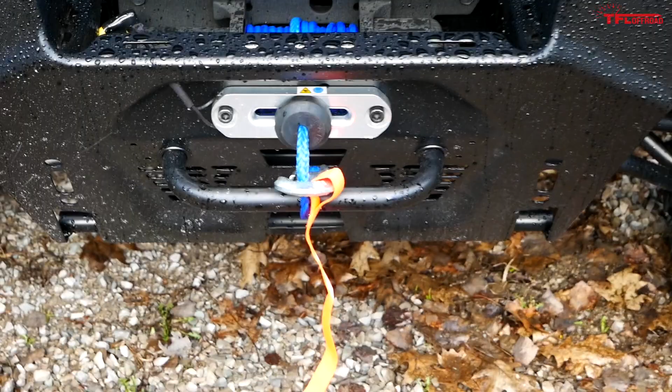Here's another one of the upgrades. That is a winch right from the factory, 4,500 pounds, and it uses Polaris's new synthetic rope, so there's no more steel cable. Oh, and while we're talking about the winch, I should mention the winch came with this, a wireless controller, which is just brilliant. It really makes a lot of sense so that you don't have to crawl through the mud, hook up a controller, and then winch out of there. This thing, you keep it in your pocket, and then anytime you need to use that winch, you're ready to go wirelessly. I cannot wait to put that winch to use.

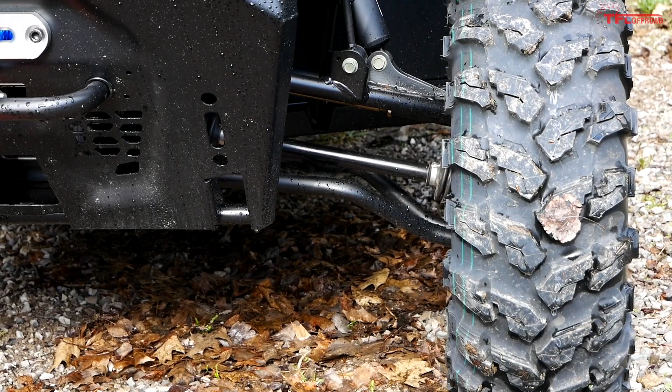And then another one of the big upgrades you can see right here in the front, arched A-arms. Those arched A-arms just help to get everything up out of the mud, and the less stuff you're dragging in the mud, the better. Now Polaris lists the ground clearance here on the Backcountry Edition at a full 13 inches.

So those are some of the changes, but when we're talking about the powertrain here, it stays exactly the same. So the engine is still a 999cc 4-stroke dual overhead cam twin cylinder making 82 horsepower, and you can see the engine right back here.

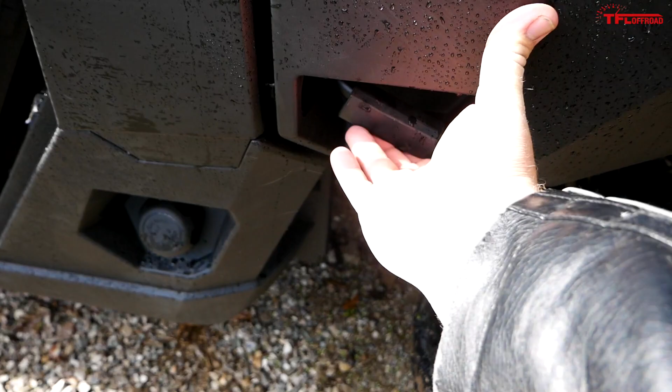Now having those snorkels does not affect the dump box, so you still grab your handle down here and the bed will dump for you and also give you access to the engine.

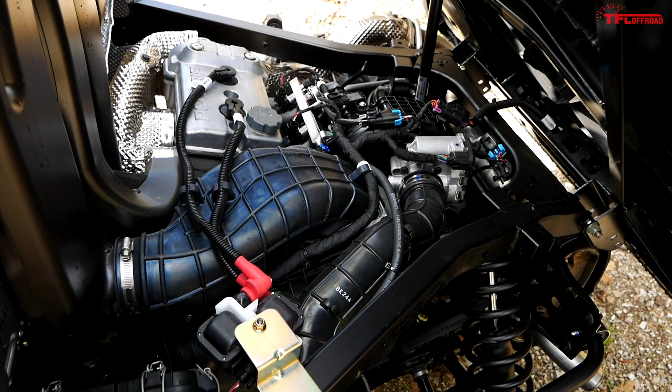So like I said, this is the same engine in the regular XP1000, offering 82 horsepower, but here in the Backcountry Edition we also get lower gearing, so this engine should feel a little bit beefier low down than the standard XP1000 does, and it should also have just a slightly lower top speed because the gearing is a little bit lower.

Now let me riddle off a couple more numbers for you guys. So the estimated dry weight of this machine is 1,597 pounds. The box back here is rated to handle 1,000 pounds of payload, and I definitely want to put that to the test. The fuel tank on this Ranger equals a total of 11.5 gallons or 43.5 liters.

Ground clearance, as I mentioned, is 13 inches. Now overall vehicle size, the length here we're talking 120 inches, the width we're at 62.5 inches, and then the height you're at 77 inches.

If you're talking about overall payload capacity, Polaris puts it at 1,500 pounds. So basically if you get 1,000 in the bed, you can still put 500 pounds of people up here in the cab. The wheelbase here, we have a total of 81 inches from the rear up there to the front.

4-wheel hydraulic disc brakes all around. And then those actual tires are 27-inch Maxxis units, which are not unique to this machine, they do come on the regular XP1000 as well.

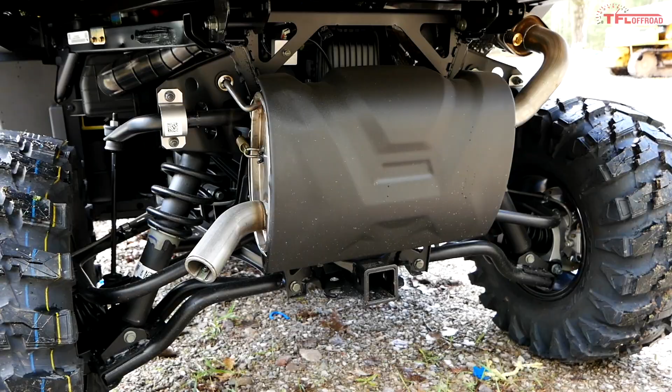Now let me show you the interior a little bit and the 4-inch LCD rider display. So this unit, as standard, comes with these nets. You open them up there, and then you pop the little metal foot out of there, and we can hop in and take a look at this screen.

You know what, we'll start her up. Not a bad looking LCD screen, controlled by these buttons right up here. So you can cycle through trip 1, trip 2, volts, engine hours, and as you can see, it only has 0.7 hours. This unit is brand new, never been used before.

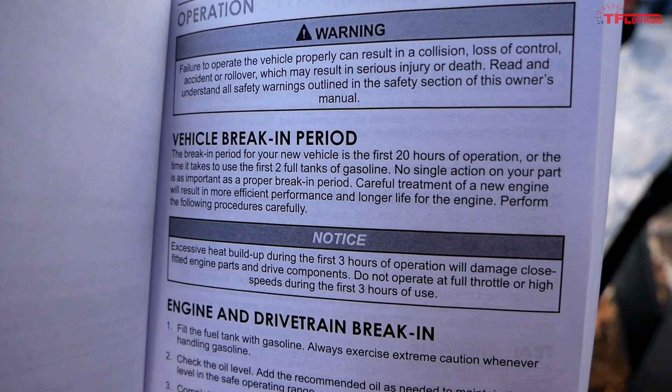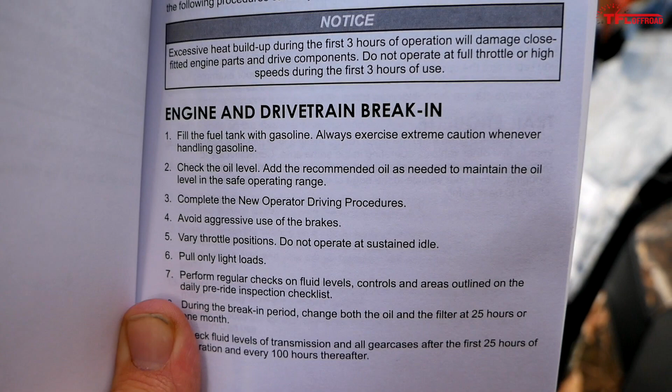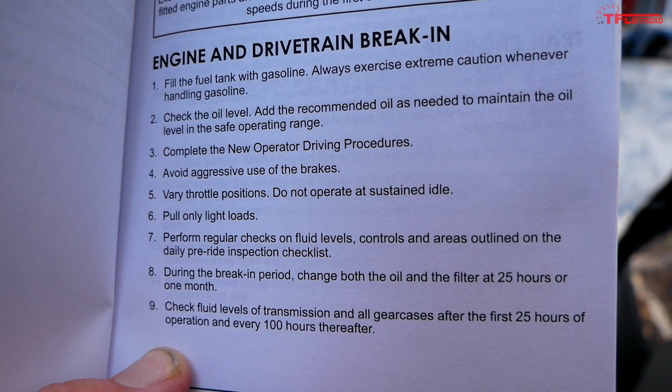It is true that this machine is brand new, so before we go any further, I want to show you what the break-in procedure is like straight from the owner's manual. So it says that it takes up the first 20 hours of operation or the time it takes to use the first 2 tanks of gas. And you know what, it's pretty close to what you'll find in most vehicles. So you want to fill it up, check your oil, avoid aggressive use of the brakes. You never want to run in a sustained position on the throttle. Pull only light load, so don't load it up right away.

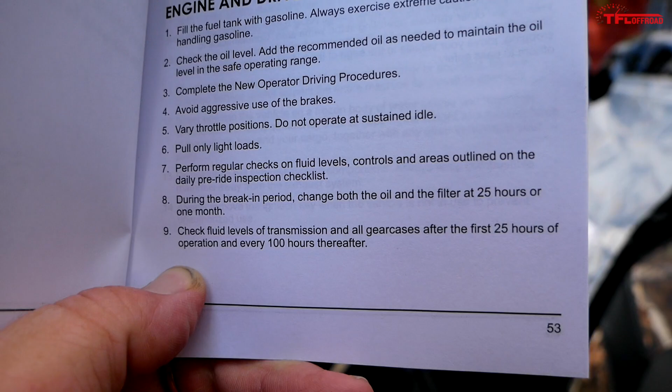And then basically keep on checking your fluids. At 25 hours, Polaris recommends your very first service. And then after that, it's 100-hour intervals, which is pretty nice.

There's a little bit more here on the second page. Now, like I mentioned, this machine is brand new to us and also just brand new. So we're going to go through this break-in procedure and hopefully get her nice and broken in before we run it too hard. We might not do the entire thing. We'll have to wait and see.

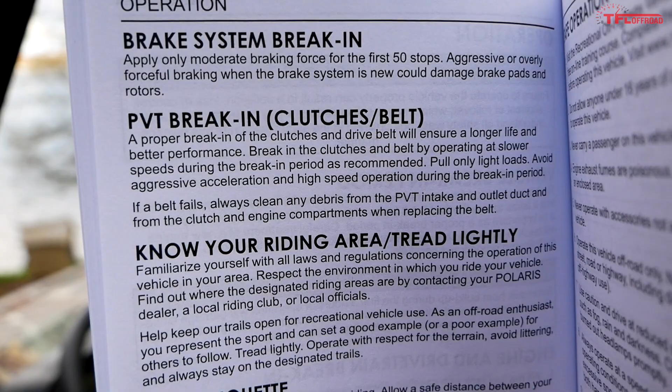So with the brake system, you got to take it easy for the first 50 stops. For the clutches and the belt, it's basically just take it easy, start off light, and make sure you never run at a sustained throttle.

And then this stuff is just telling you not to get into situations you can't get out of. Tread lightly and take care of the trails while you're out there. Service interval, and then a timer, and then engine temperature, and then the odometer. So it's only got 1.8 kilometers. I can't wait to put some more kilometers on this thing.

Now, also in here in the interior, you get a couple cubbies up here in the dash, a couple cup holders. Down here we have our switches to go from performance, standard, and work mode, and then of course 4-wheel drive, 2-wheel drive, or just 1-wheel drive turf mode.

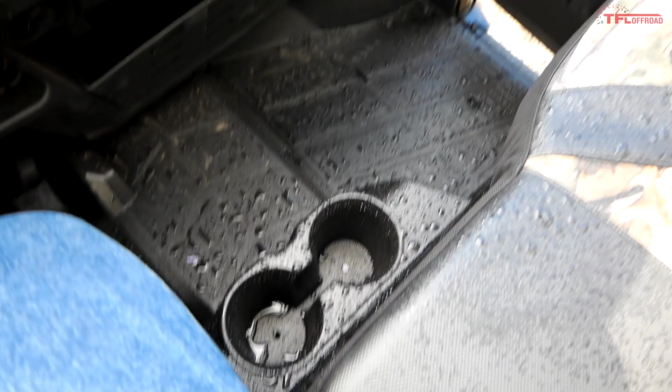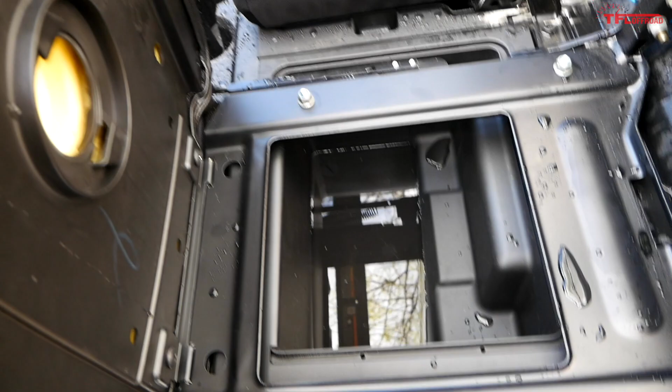Over here for the passenger, you have a couple of storage options. You have a top glove box and then a much larger lower glove box stuffed with all our lovely paperwork. And then down on the floor you get a couple more cup holders, and then I can also show you a little bit of storage here underneath the driver's seat, which is actually full of water right now, and there's one oversight. That should probably have a plug in it so I could drain that out of there. It'll likely come out of there when I start crashing down the trail tomorrow.

And then let's open up here on the passenger side and see what's here for storage. Oh, this is just like the regular XP. It flips open, and right there you can see they put in that cutout so you can put a bucket in there. It'll actually sort of be held onto. Looks like there's a toolkit right down in here. And this cover also opens up and gives you some access down to your powertrain.

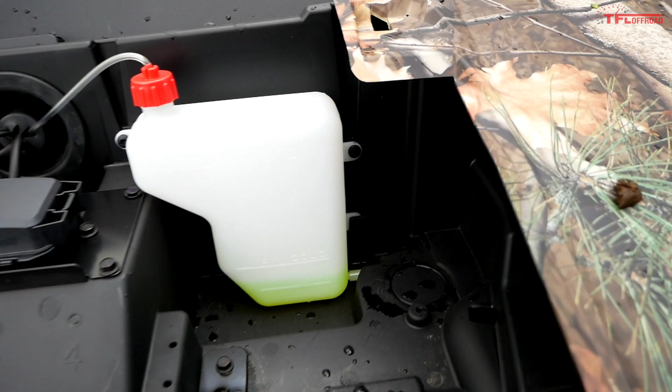Now I want to show you under this hood. So I already undid the clips, I got it off, and it reveals a couple of things. First of all, there's your coolant right there. So if you need to top up the coolant, there's the top of the rad. You can do that.

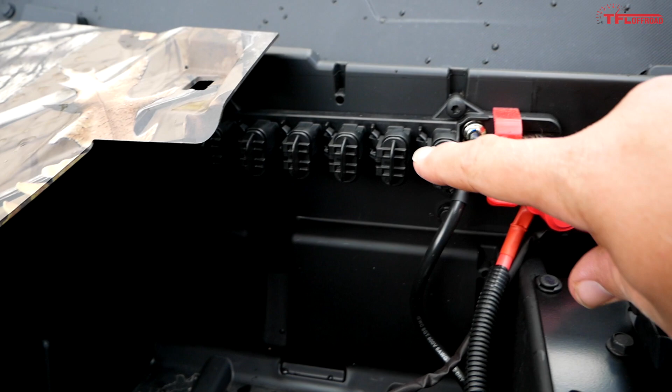And then what's even more important and what's cooler is right here. This is called the Pulse Bus Bar, and essentially these are just plug and play ports for different accessories. So if you want to add a light bar or something, you install that up on your machine, you run the wiring, and it plugs in right here, making it very convenient for adding accessories simply.

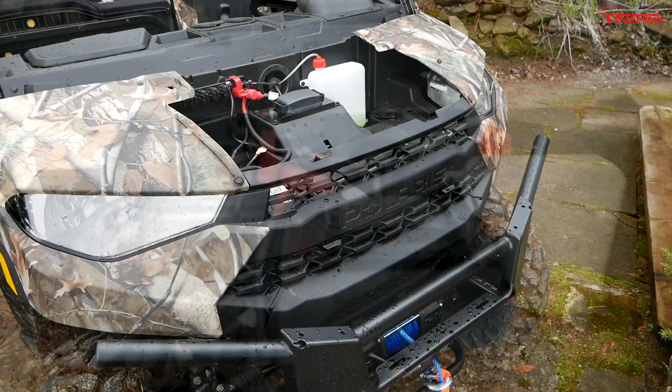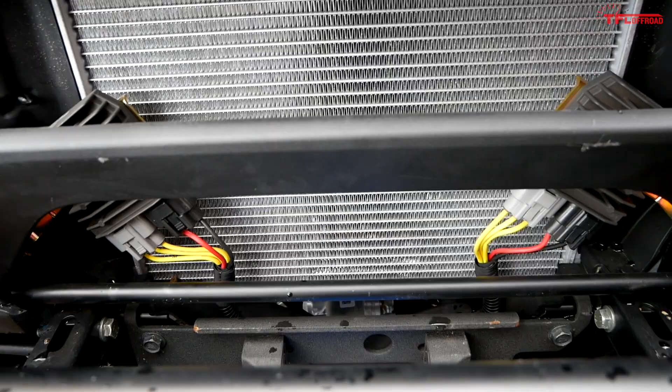There's one more trick I can show you up here in the front end. You can see this whole lower panel in the grille. It's loose, and if you pull down these little tabs, which I already did, this whole panel pops off just like that. And what that's going to let you do is get access straight into your rad. So if you do get your radiator gummed up with mud or something and you start to overheat, you pull this panel off, and then you have pure access so you can clean it up and make sure it's going to run correctly.

So now one of the big questions is, what does it cost? And I'll be honest, this thing definitely does not come cheap. Here in Canada, the Ranger Backcountry Edition is going to sell for $24,399, whereas south of the border in the United States, you're talking about $19,899. And you know what? That is a jump, a considerable jump over a base XP1000, but you are getting sort of a nicely tailored package for hitting some real serious mud and ruts and water.

So there's no doubt this thing is very expensive, and the question becomes, is it worth it? Well, that's what I want to find out over the next couple of months, and I want you guys to chime in. Go in the comments, let me know what you would like to see. I have a lot of time with this machine, so I definitely want to get to know it. I want to put it to the test. I want to make sure I test every aspect of it, especially payload and towing. A lot of people don't do max payload tests or max towing tests on side-by-sides, and I definitely want to do that to see if the high numbers here are really all they're cracked up to be.